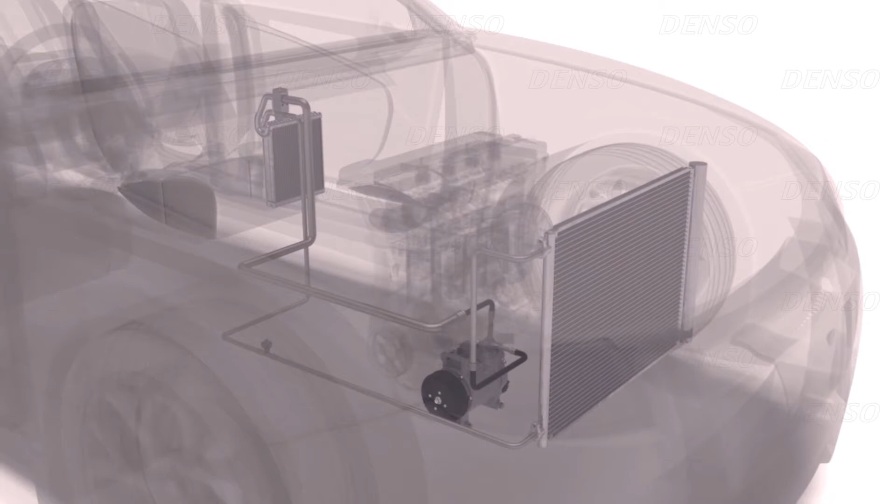Air conditioning systems create a comfortable temperature and humidity inside the passenger compartment, so the driver and passengers feel more relaxed and cool, and the driver is then able to concentrate on driving, which leads to increased road safety. Air conditioning operation relies on taking heat out of the passenger compartment by absorbing the heat into a refrigerant that transports the heat away from the passenger compartment so that it can be released to the outside air.

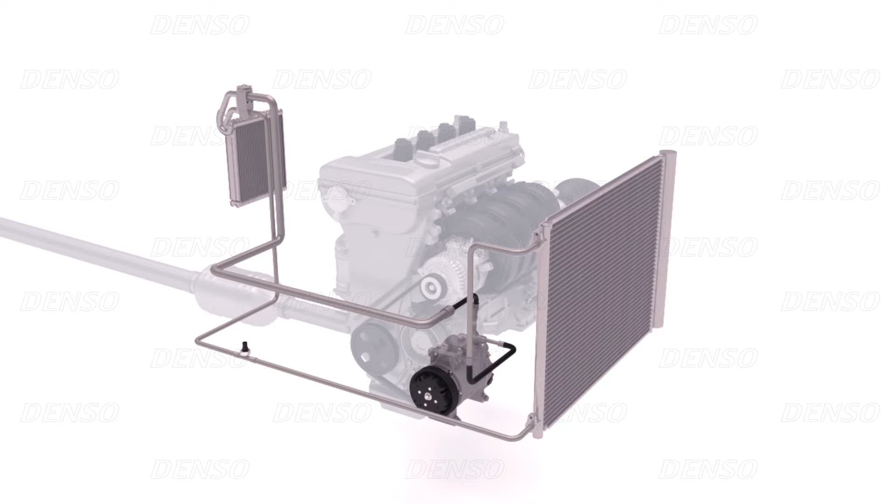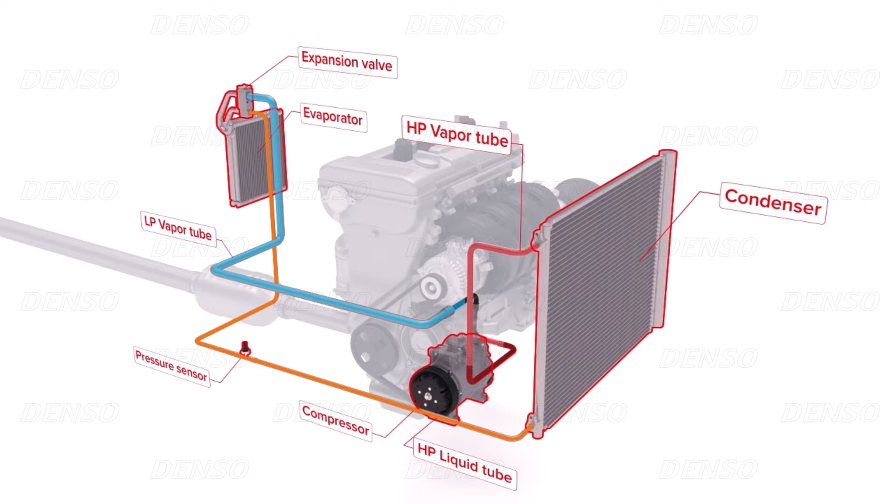The main components of an air conditioning system are the compressor, the condenser, the expansion valve, and the evaporator. And the refrigerant used to absorb the heat in most air conditioning systems is known as R134A. But since January 2017, new car air conditioning systems must use R1234YF for environmental reasons. We can now look at air conditioning operation in greater detail, starting with the compressor that creates the flow of refrigerant through the air conditioning system.

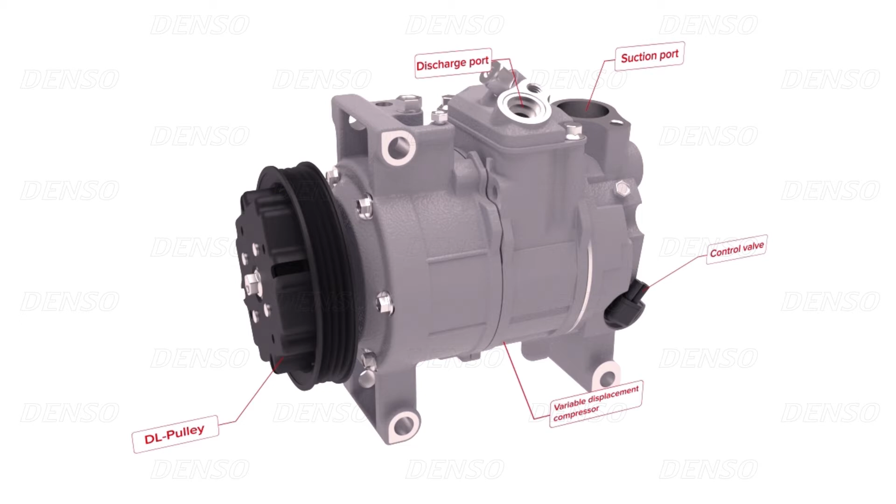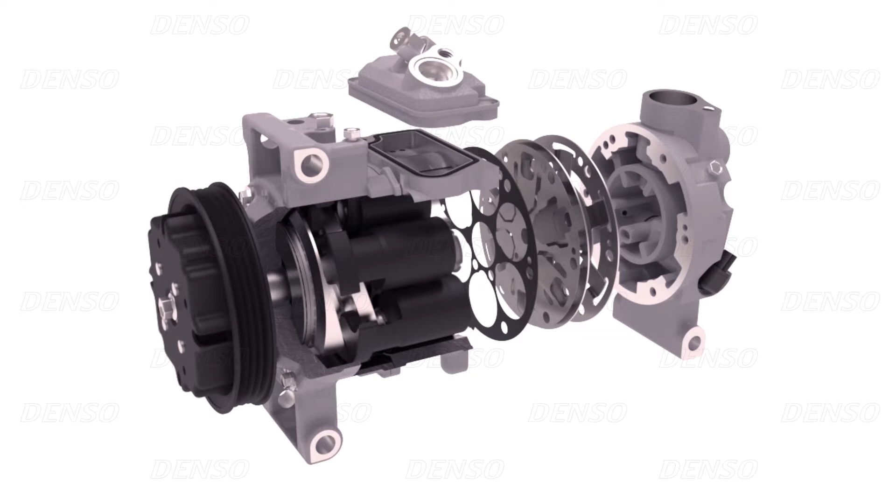The compressor is usually driven by the engine using a drive belt, with a magnetic clutch being used to engage and disengage the drive to the compressor. For some systems, a DL pulley is used that continuously drives a variable displacement type compressor, and for electric and hybrid vehicles, the compressors are driven by electric motors. To provide lubrication, a specific amount of special compressor oil is added to the refrigerant.

The compressor creates a high pressure at the discharge port and a low pressure at the suction port. The compressor sucks in the gaseous refrigerant from the evaporator, where this superheated refrigerant has absorbed heat from the passenger compartment. The gas is then compressed, which adds additional heat, and the high-temperature, high-pressure gas is then forced from the compressor discharge port to the condenser.

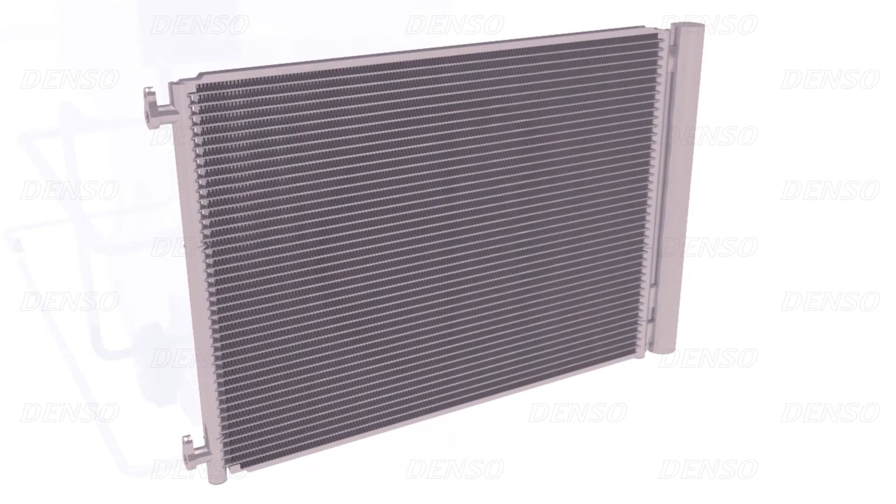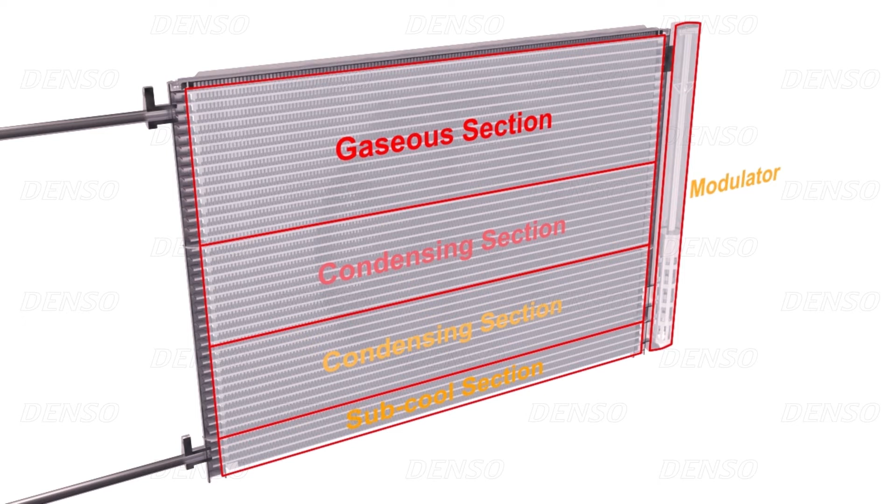The DENSO subcool type condenser operates using the same principles as a domestic radiator, because the condenser transfers heat to the air. The condenser is divided into four main sections: a gaseous section, to remove the heat from the hot gas, a condensing section, a gas-liquid separator, known as the modulator, and a subcooling section, with the high-pressure refrigerant flowing through these four sections in that order.

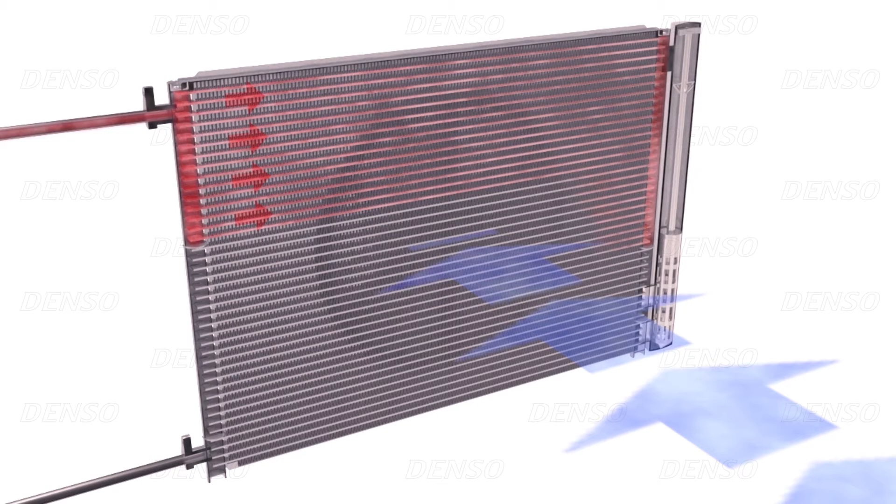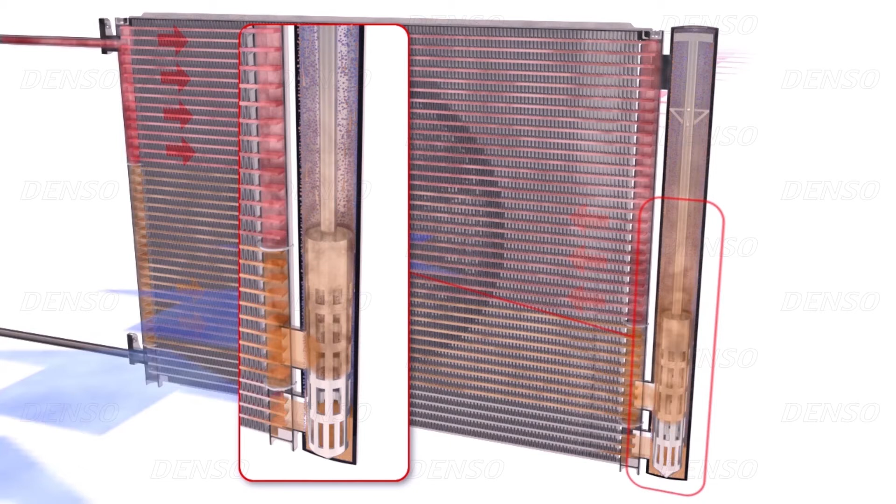The gaseous, condensing and subcooling sections consist of tubes and fins, and, as the refrigerant passes through the gaseous section, the heat contained in the high-temperature refrigerant gas transfers through the fins to the outside air. This loss of heat reduces the gas temperature, which allows the gas to condense within the condensing section, where it naturally changes state to a liquid.

The liquid refrigerant then passes to the gas-liquid separator section, where any remaining gas is separated from the liquid, providing further opportunity for the gas to release heat and change to a liquid. The liquid refrigerant then receives additional cooling in the subcooling section, where the heat energy contained in the liquid refrigerant is again released through the condenser fins to the air. This further reduces the temperature and improves the overall cooling performance.

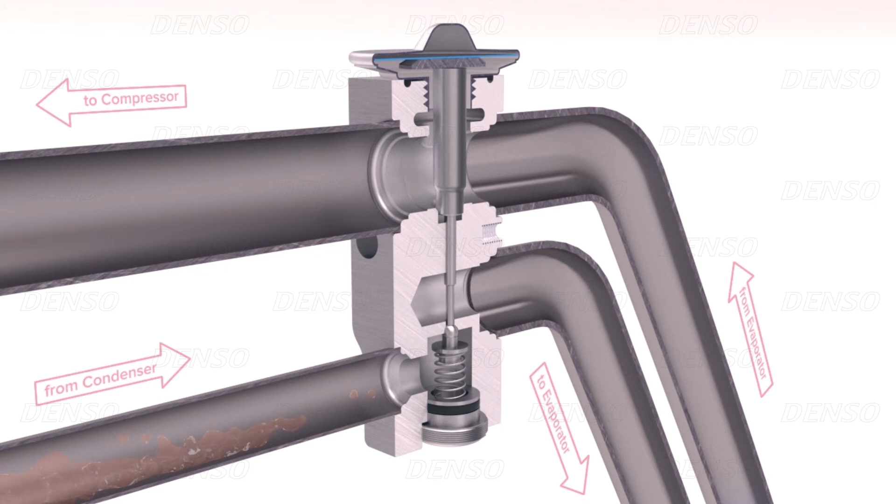Next, the cooled liquid refrigerant flows to the expansion valve, where the high pressure of the refrigerant forces it through a small orifice or hole, and this has the effect of injecting the refrigerant from the orifice as a mist that is then able to expand. The expansion allows the pressure to reduce, which also reduces the temperature, and this causes the refrigerant to again change state from a warm, high-pressure liquid into a cooler, low-pressure mist that is able to more easily absorb heat when it passes through the evaporator.

The expansion valve also adjusts the quantity or flow of refrigerant passing to the evaporator. Too little or too much refrigerant results in too little or too much heat being removed from the passenger compartment. The low-pressure mist refrigerant now flows into the last major component of the air conditioning system, the evaporator, which is located within the air conditioning unit.

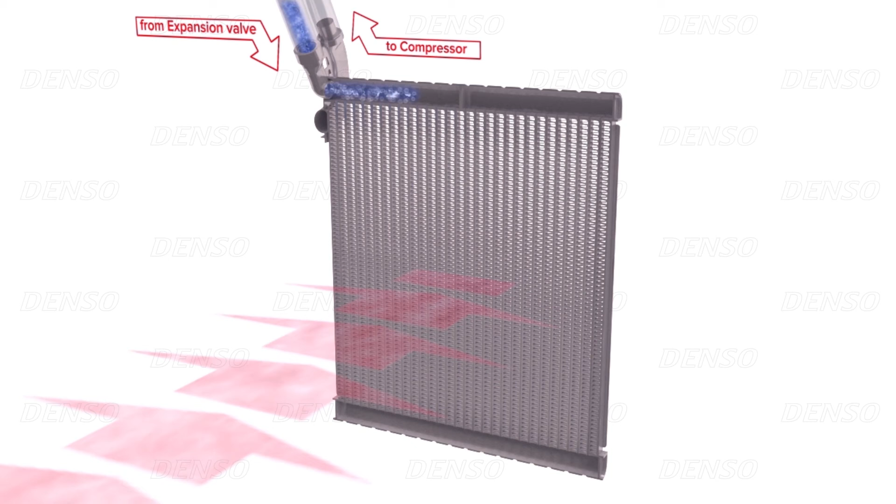The evaporator consists of a tank, tubing, and fins that are exposed to the air in the passenger compartment. Therefore, heat from the air is able to transfer to the fins, and it is then absorbed into the refrigerant mist. And at the exact moment that the refrigerant absorbs this heat, it vaporizes and changes back to a gas. This superheated gaseous refrigerant then flows from the evaporator and back to the compressor, where the whole process starts again. We call this whole process the refrigerant cycle.

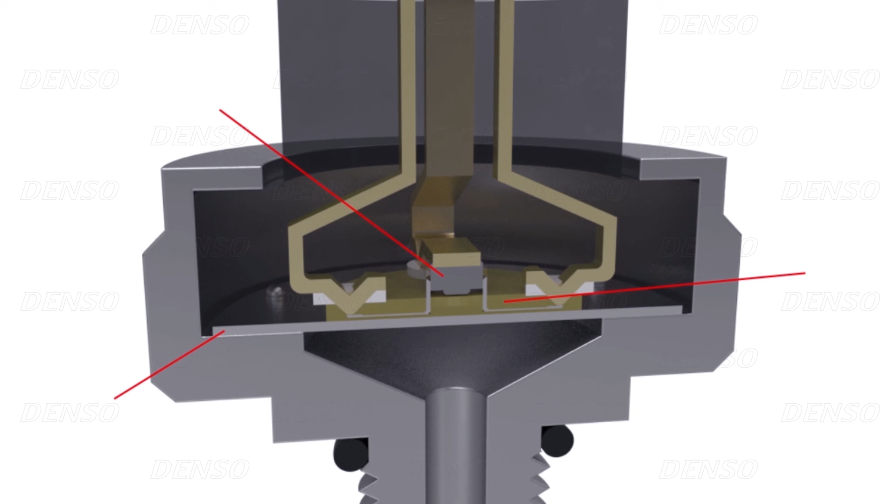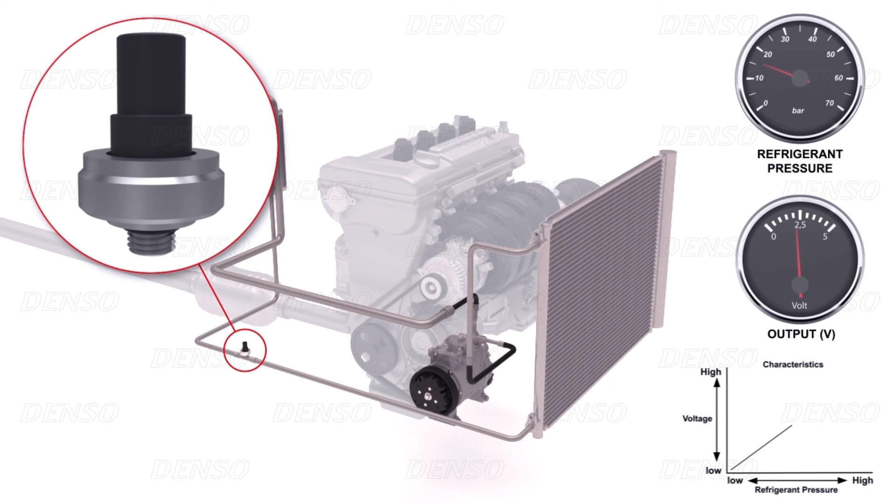One final and important component fitted to DENSO air conditioning systems is the pressure sensor that is used as a simple safety device. The sensor detects the refrigerant pressure on the high pressure side between the condenser and the expansion valve, so if the pressure is incorrect, which could cause damage to the system components, the compressor can be switched off.